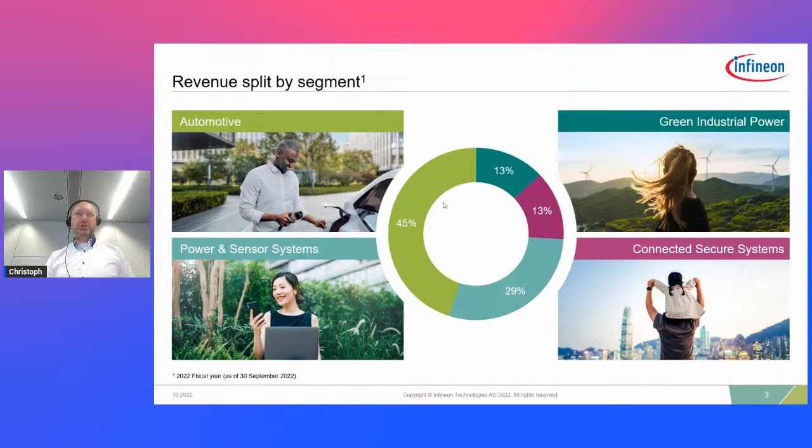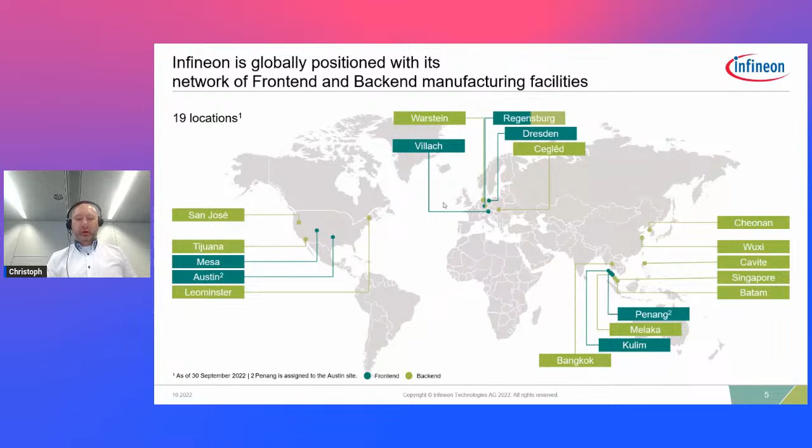So I'm talking to you today from the Dresden location, working here in the development center, a special part of Infineon where we do research and development. My job is to come up with new products for Infineon, especially for the Green Industrial Power Division, which does all this power semiconductor business for Infineon, especially for our industrial customers.

About 13% of the annual revenue of Infineon goes into research and development. We invest a lot into coming up with cool new products, and we do this in 59 sites in 35 countries all over the world. A lot of interesting people are working here at Infineon.

We will also see a little bit how sensors and people connect here at Infineon, the project I want to describe to you. You have people, for example, working in field sales. You have maintenance technicians, who are the ones I want to support with my sensor solution today - we will see more about Thomas and what he's doing and how we can support him. Also, there are field application engineering people, for example Marcel in Munich, or Dr...

Pamela Lin working in Singapore as a data scientist. Also, people, for example, I have here in my teams—it's really a broad community. It's an international community. It's a lot of fun to work for Infineon and work on new groundbreaking technologies.

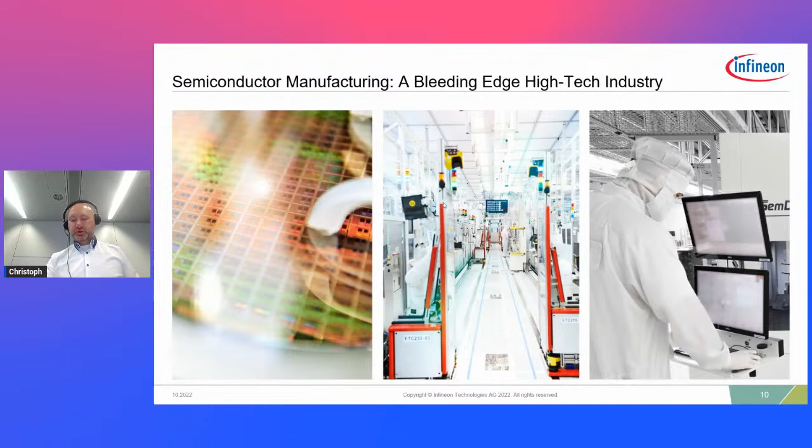Maybe a few words about the region where we are here. I'm situated in Dresden, and we call this region Silicon Saxony. Saxony is the federal state of Germany where Dresden is the capital. It's really Europe's biggest IoT cluster—a lot of companies concerned with the Internet of Things are situated here in Dresden. Infineon is not the only one here producing semiconductors, there are a lot of other fabs, for example GlobalFoundries, who were also partners in this project.

There's Bosch here, there's X-Fab, Renesas—a lot of institutes and companies who produce semiconductors are situated here in Dresden. It's really the biggest cluster. You also have a lot of software companies, for example SAP, Deutsche Telekom, T-Systems, situated here in Dresden. And a lot of research organizations—you see all these Fraunhofer institutes doing basic research on how to make good semiconductor products. There's also a lot of universities here, so it's really a good, international environment where you can do a lot of innovation.

It's also situated on the border to Poland and the Czech Republic, so we also have a lot of contacts and network there, and to other countries. So it really is fun to work here.

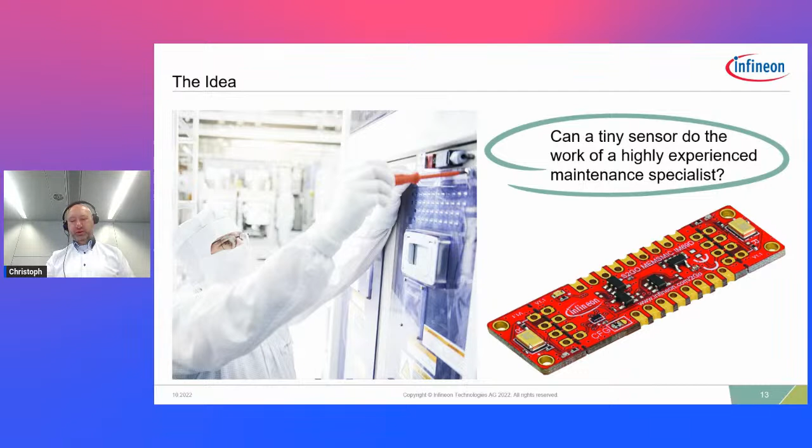We had also a lot of partners going on. Infineon provided the sensor for this project, but there were also other companies situated in the region of Dresden helping us, mainly GlobalFoundries, a company also producing semiconductors - they were partners in the project. Also T-Systems, which is a software company. Actually, when we started this program, I still was a project manager and a manager at T-Systems.

So where you need hardware, where you need software, you need connectivity between them, you need something that calculates things - a lot of companies here in the Silicon Saxony region are cooperating in the Smart Systems Hub and doing these kinds of projects together.

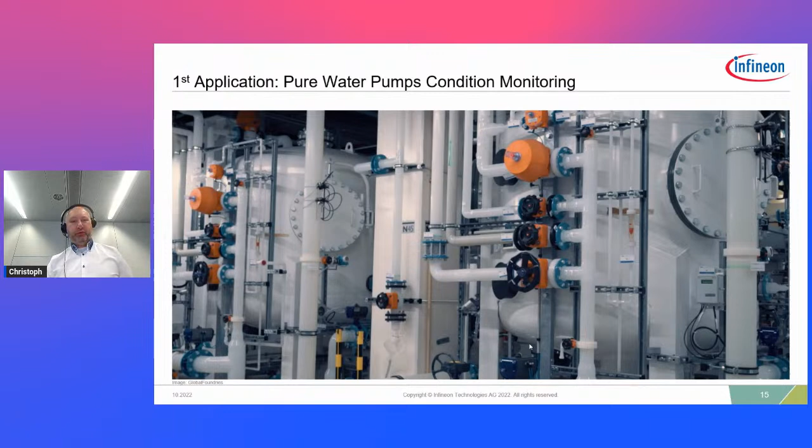So the first application where we try to do this - can we really listen to machinery and detect a failure there just by listening to it? The first applications were pure water pumps. I can show you a little bit how this looks like - let's have a look into the rooms where those water pumps are.

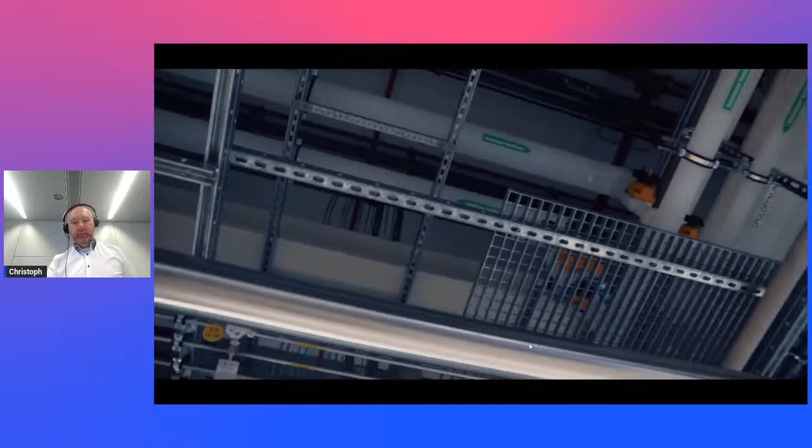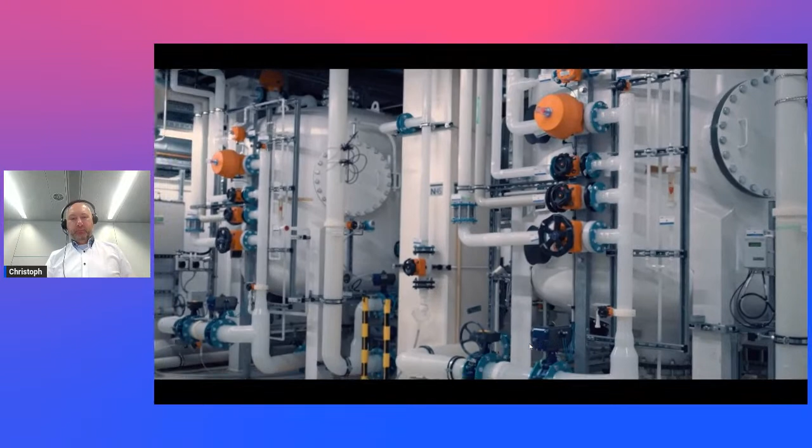This is actually a level below the clean room, what you see here in the video. All this complex machinery is one level above. And in this level down here is all the machinery that provides the chemicals, the water, the electricity for the machines that produce the semiconductors. So you see, it's really a maze of a lot of piping going on there, and we selected these orange valves that you see here in the pictures to be our first application for this project.

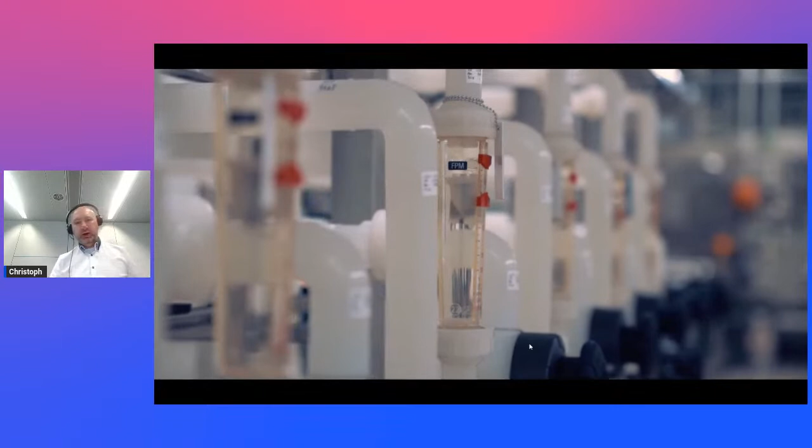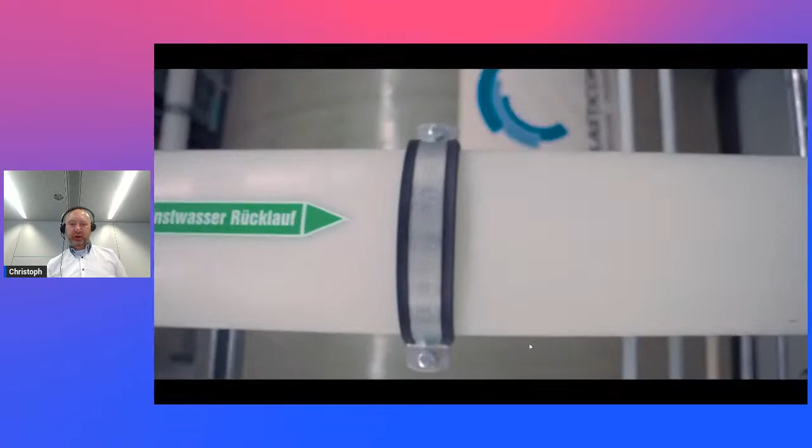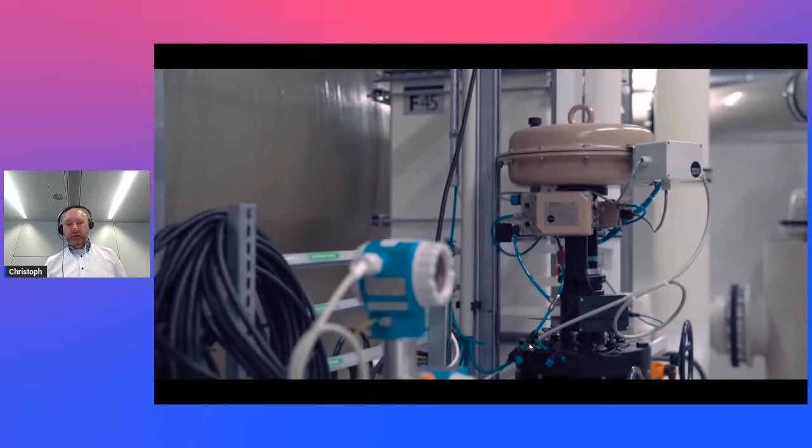So these orange valves control the flow of water. To produce semiconductors, you need a lot of chemicals, but you also need this very clean and pure water just to wash the wafers, to make them clean before you can do the next step in producing them. And it's very important that these valves don't fail, that they work every time.

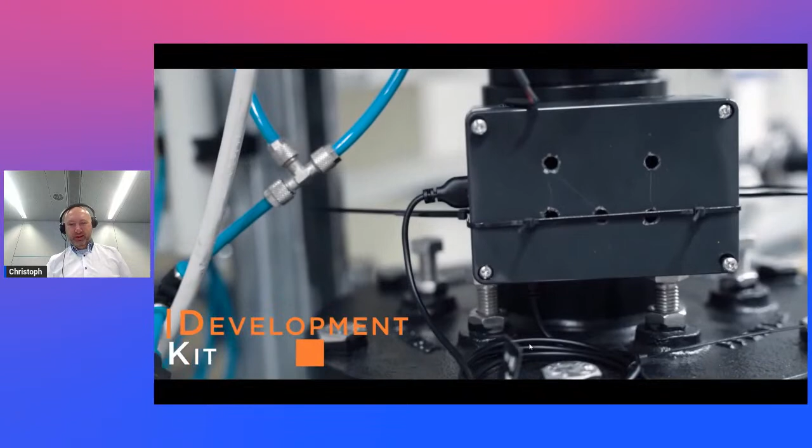So we put here - you see this in this picture - a little sensor just with duct tape to the valve to monitor this. So you have this box here, it still looks a little bit like in the lab. It was the first proof of concept that this works. Then we put a chip in here and we really listened to the machinery and tried to detect if it's okay or if it's not okay.

He can just look now on the screen, and he can see, okay, the valve is okay, or there's probably a failure there if it looks more like that. And he can go to the machinery and then attend to that.

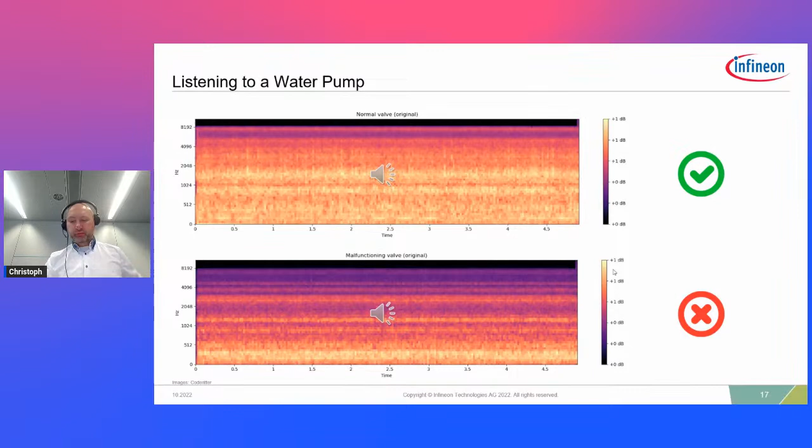So that was the first application where we did this. It was, I think, relatively easy because it's a stationary pump. You just put a microphone on that. It was not that difficult, but it was the first project we did in this area, so we broke a lot of new ground in doing that.

So here a little bit about how this looks from a technical side. You have the valves here, and you have the microphone on the valve. Then you have what we call an edge AI, an edge artificial intelligence - a special chip that's in the gateway. This is the black box you saw in the video before.

This computes some data and collects it, and then we have what we call the cloud environment - that's in the computing centers where we have the machine learning model, where we process all the data and build a model of how a valve should sound. Then we deploy this to the edge gateway, so the edge gateway can compare the sound it's hearing from the valve to what it should hear, and then it can say if it's okay or not. So that's the software part that we built there.

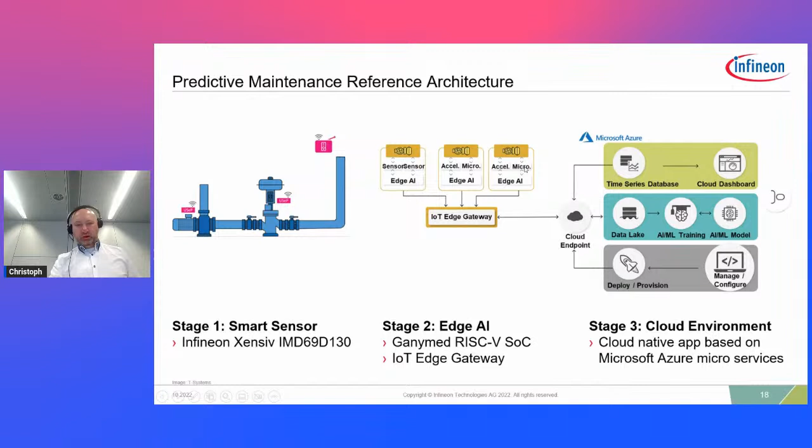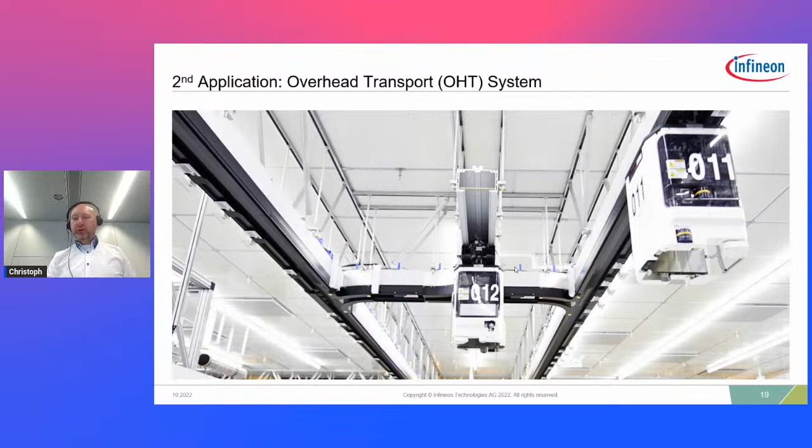Okay, so after having done that, we got a little cocky and said, hey, let's see if we can apply this to other things, maybe to more complex applications. So we had a look at our overhead transport system. The overhead transport system is very important - you find something like that in all modern semiconductor fabs, and again, we can have a look into that.

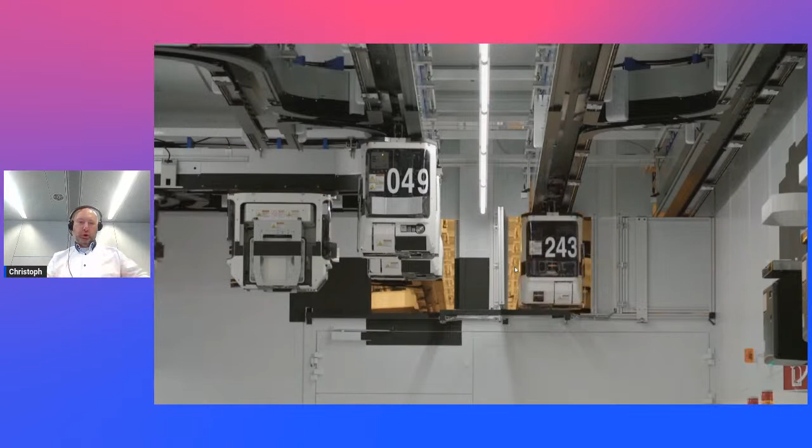So you see on the ceiling there are these cars going on. They go automatically, and what they do is transport the wafers. They are inside boxes, and they transport them from one machine to the next to do the next production step. It's all automated. You see them going around here, all the vehicles coming up. Then they go over the machine, position themselves over it, and lower the boxes with the wafers, take the wafers out, and then transport them to the next machinery.

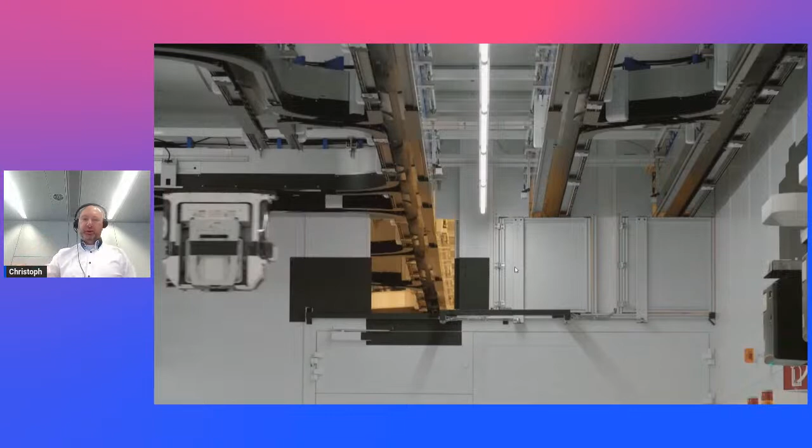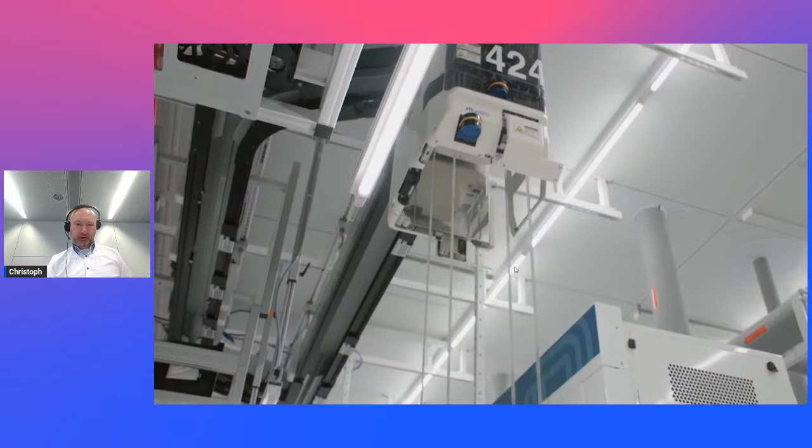So it's very important that they run every time - you won't have one that fails there on the rail. Here you can see it: it goes down, takes the boxes here from the wafers, connects to them, hoists them to the top, and transports them to the next machinery.

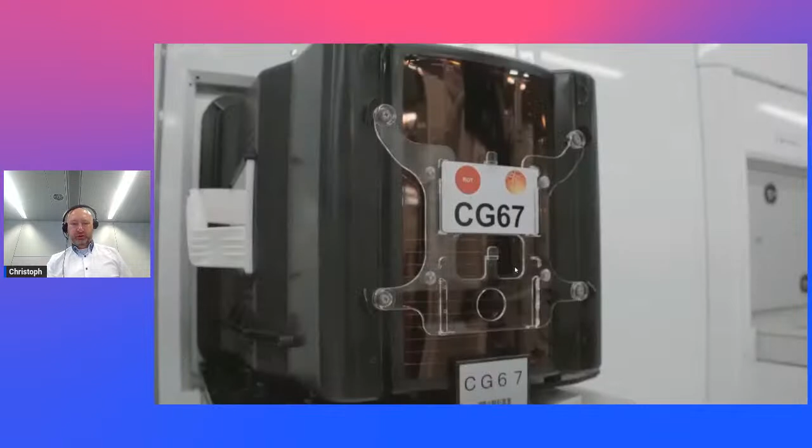So that's actually a picture from the GlobalFoundries clean room, where we had the first installation of the system, just neighboring here in Dresden. And there are some challenges when we try to do this.

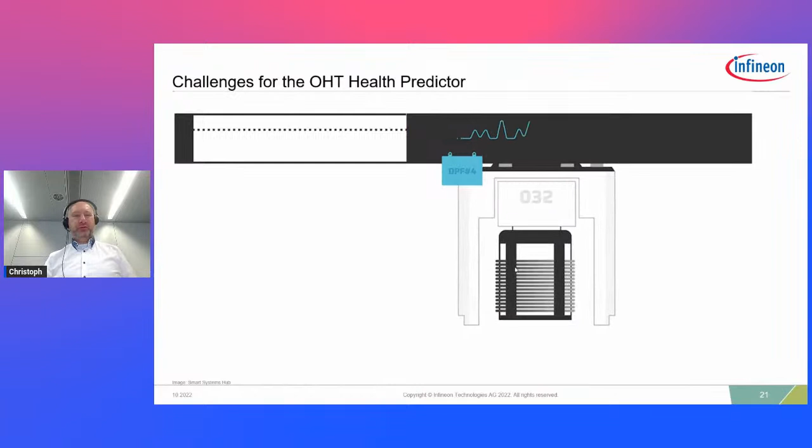So what we tried to do was an overhead transport system, or OHT, health predictor. We want to mount the microphone here on the rail at the top - not on every vehicle, but on the rail. Then when the vehicle is going by, we wanted to just listen to it and see if there's some breakage. Typical things that can break in these kinds of vehicles are, for example, the wheels.

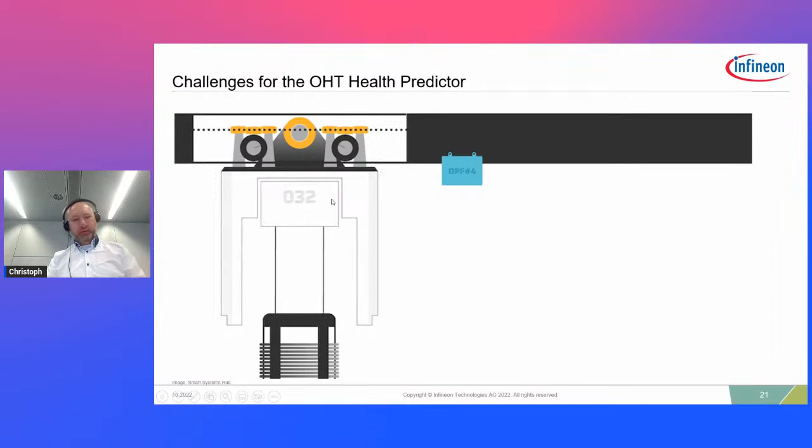There are ball bearings in the wheels, and they can fail or be damaged. Also the vehicles have brakes, and the brake, for example, might not be opening, so it's scraping along the rail, or other things that can break. But again, there's a lot you can hear, and that's what we try to do - just mount a sensor in the rail, and when the vehicle goes by, identify if it's okay or not.

So some challenges we had: of course, there are a lot of vehicles which you have to identify. You have to know which vehicle is just going by at the moment. For example, we have a few hundred of these vehicles going on here every day, constantly moving, and you have to know which number is the one you just heard by the microphone.

We also had some additional data sources - it was not only the microphone, not only the sound. We wanted to use other data sources too. For example, there's a database computer that stores messages from these vehicles, and we wanted to look into that database to see if there are failures the vehicle has already reported, that we can also use to predict if the vehicle is okay or not.

And also scalability - can you really do this on a big scale? In the project before, we had just a few pumps, and it's relatively easy to do this for a few pumps. But do this for, let's say, a couple hundred of these vehicles in one fab, and then of course you want to do this on all the fabs you have globally. I showed you how many fabs Infineon has, and other semiconductor manufacturers also have a lot of these fabs. So when you do this in a lot of fabs, you have to build a system that can work globally and worldwide. That's something we try to do here in this second project.

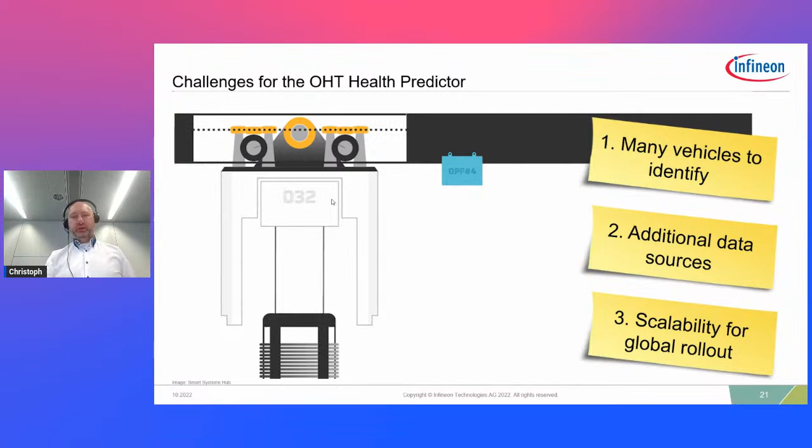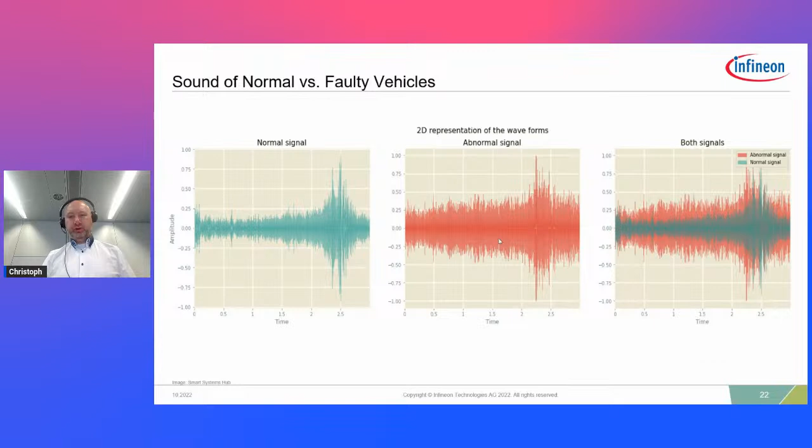We trained an artificial intelligence, a neural network, to detect these kinds of sounds. That was relatively easy and straightforward, and then we could detect if the vehicle is okay or not. We even tried to detect different types of failures - for example, if it's a brake that's scraping, or a ball bearing that's broken, or if there are control rods in the front of the vehicle that are bent, which emit a different kind of sound. So we tried to distinguish between these different failures and could do that. That was the relatively easy part for our data scientists.

We also had this different database, where we looked into the database of the vehicles. We did this at first just to see what number of vehicle is going by at that position, so you have to know what vehicle you're listening to, and we did that by looking into the database. But we also looked at error messages the vehicle put into the database, as an additional data source, to see on a dashboard - a representation on a computer screen where you see all the vehicles. Then you can say, okay, vehicle number 345 is fine, it's probably okay, it sounds okay. But maybe 347 sounds like there's a ball bearing broken or something like that.

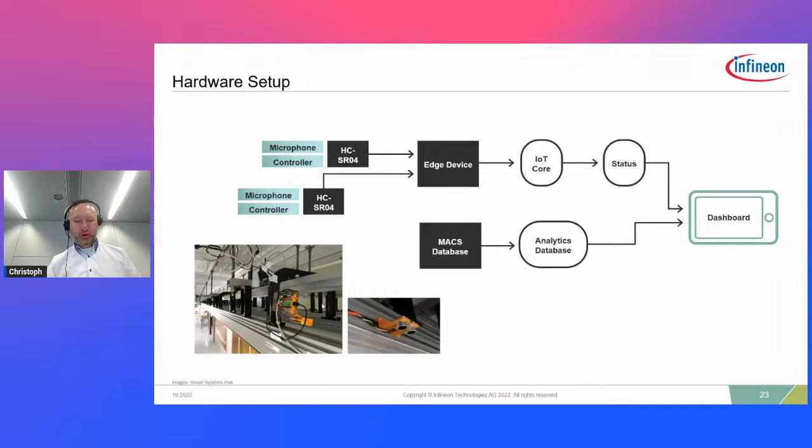You can also see here how this looked. We had this installed on the rail, so it still looks a little bit like in the lab - a lot of cables going on here. This was just to try it, and later we built a better box, I'll show you that. We also had some sensors - an ultrasonic sensor, so it's ultrasound. It just detects when a vehicle is approaching this microphone so that we can record the few seconds of sound we need when the vehicle is actually going by. So that was the things that we had here.

So what does it mean to do something like that for business? We talked to our colleagues from GlobalFoundries, and Lars, one of the technicians at GlobalFoundries here in Dresden, told us the main thing you get from such a system is that you can reduce the downtime. Downtime means if a vehicle breaks on those rails and stops, it's immediately a traffic jam - vehicles can't go by, they can't overtake on this rail. So you have immediately an impact on your production, since the wafer boxes can't go from one machine to the other.

So you just lose output of your factory. That's something you see immediately in money and in revenue. So that's something we want to prevent.

And Lars from GlobalFoundries suggested we can save 25 to 35% of these things when the vehicles are really breaking down and jamming our rail there. So that's the first thing.

But also, if you look at how you do maintenance of the vehicles, of course, because you don't want them to break, what you actually do is a lot of effort in making sure these vehicles don't break. So you inspect them regularly. Again, probably the same like your parents do with the car. So once every 2 years or so, you take your car to an inspection. You see if everything is okay. It gets a sticker and can go back on the street.

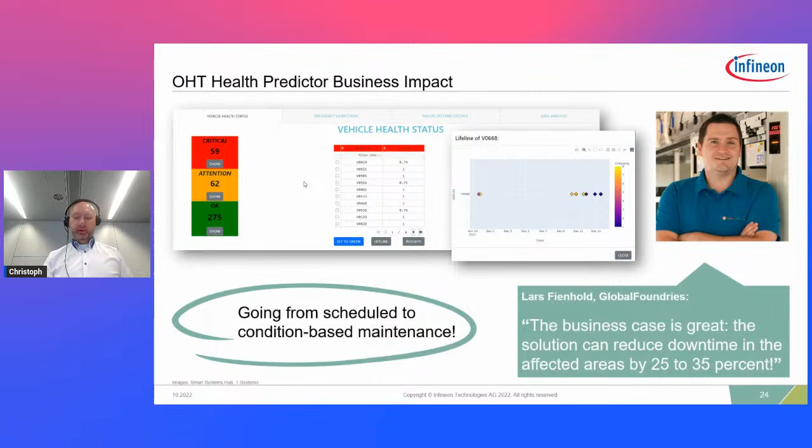Some things we learned along the way in this project. One thing we learned is actually the position where you put a microphone on the rail. You can choose every spot, but it's really important to choose the right spot.

You also don't have much background noise because in the tunnel there's no other machinery, it's just the vehicles here. So it's a little bit easier to distinguish the sound of the vehicle from the sounds of machinery that is elsewhere.

For example, this control rod in the front of the vehicle guides the vehicle through the curves. You can really hear it only when it takes a turn, so you have to put a microphone into that.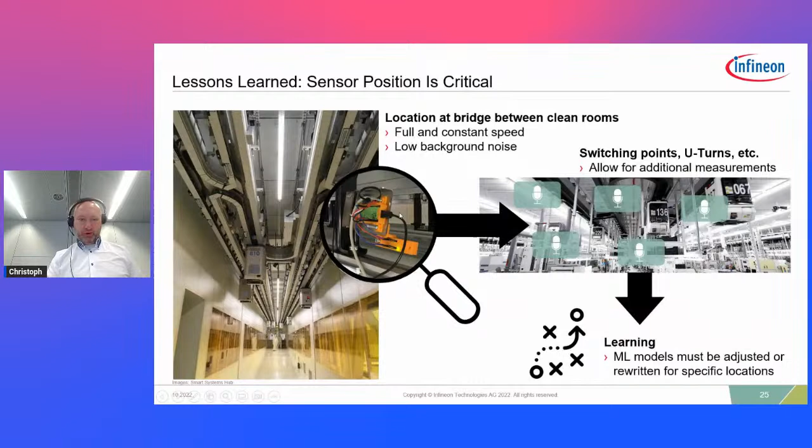But when you do it for a couple of hundred vehicles across different factories worldwide, you have to build a system that's more rugged and scalable. We did this in two ways. The first picture shown here is the test setup we had on the rail. Later we had a partner build a really good device for that, a rugged case with power flowing in so you can put it anywhere, and it can be produced by different manufacturers in the hundreds or thousands, so you can really roll this out globally.

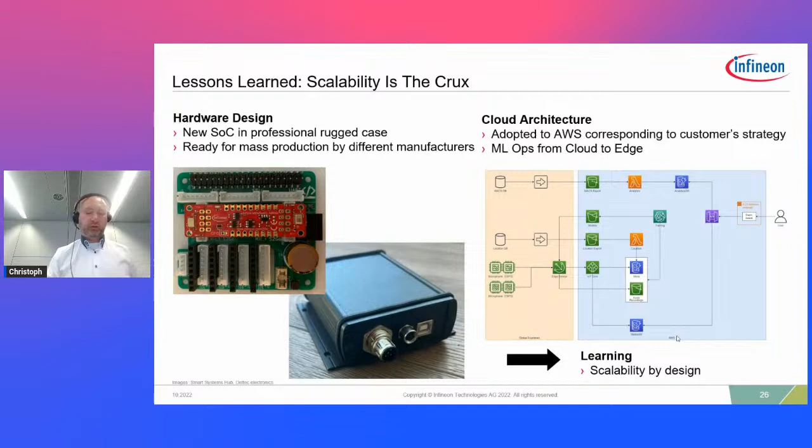Also, the cloud architecture, the software part, we had to adapt just to do this on a global scale. A lot of effort went into this architecture, into the software and code we wrote, so that you can really apply it globally to different fabs. And there were also some fun stories along the way.

One of the fun stories involved the software team going into the fab of GlobalFoundries to install the sensors. That was my team from T-Systems before. My colleagues went into GlobalFoundries, I think on a weekend. They went into the clean room and put on these clean room suits, the white ones, so they could enter.

Then they tried to put the sensor on the rail, and they selected a spot where there was no Wi-Fi network—the only spot in the whole GlobalFoundries factory without Wi-Fi. I got a call, I think on the weekend, and they asked me, do you have some router? Do you have some Wi-Fi router? We need to put an additional one there.

Later, when I switched to Infineon, I was telling my colleagues here that the personal router of an Infineon employee was still working at GlobalFoundries, making sure critical data from the microphones goes into the cloud. They switched it out eventually, but it was a fun story that shows how we work together—even as different companies, competitors in one area but working together in others. I think this is especially true here in the region of Dresden and Silicon Saxony, with a lot of cooperation going on to solve common problems we have in the industry.

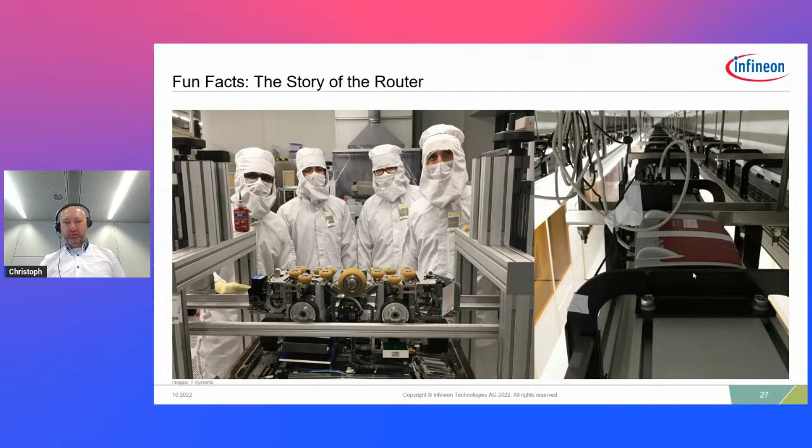Okay, let's end with a small outlook on what we're doing currently. There are some follow-up projects where we want to include additional sensor data. There are now people working at GlobalFoundries to add a camera as well, so not just listening to these robots, but also having visual inspection.

They mount a camera looking on top of the vehicle, so you can see different failures just by looking at the device instead of listening. For example, the casings of all the vehicles are white, which is good because you can see debris from the brakes accumulating on top as black stuff, visible with a camera. That's the kind of thing they're trying to do now, integrating a camera to look for different kinds of failures.

They also want to measure the vibration of the vehicles, how they swing when going through a curve, using accelerometers to detect this vibration—again a different kind of sensor. For us at Infineon, we now deploy the same system in our fabs because we use the same robots as GlobalFoundries, so we're in the process of deploying the same system to monitor our robots.